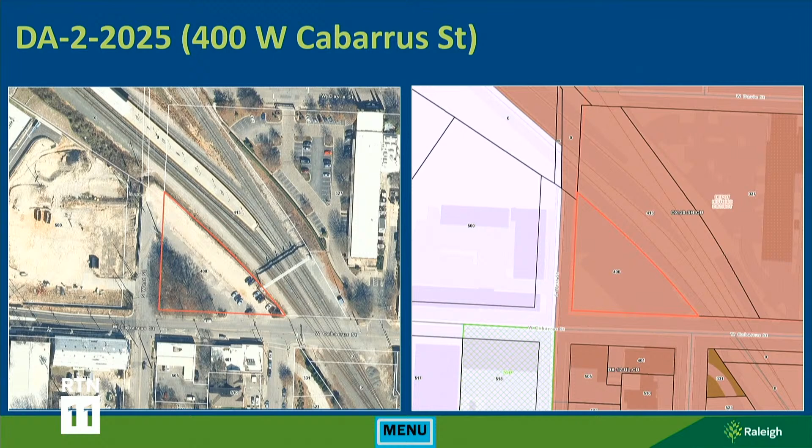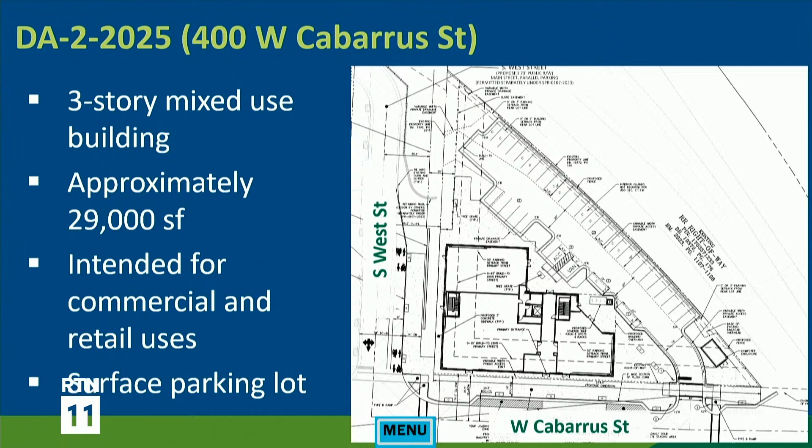The subject property here is located at the northeast corner of West Cabarrus Street and South West Street. The property is zoned downtown mixed use, 20 stories, shop front frontage, and conditional use. The applicant is proposing to construct a 3-story mixed-use building comprised of approximately 29,000 square feet with a surface parking lot. The intended uses are commercial and retail.

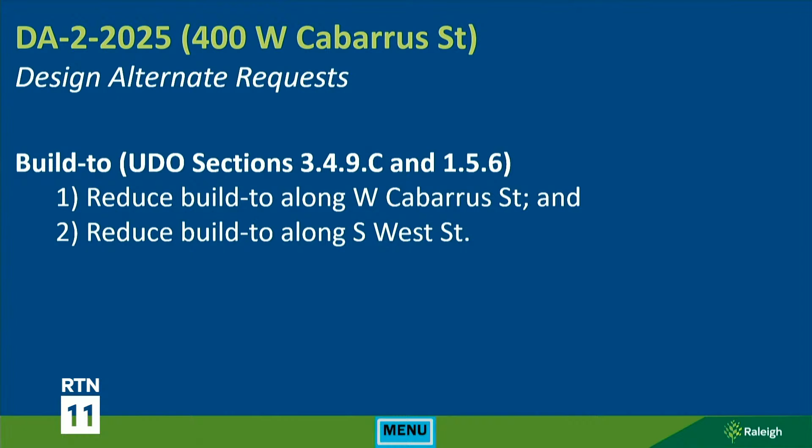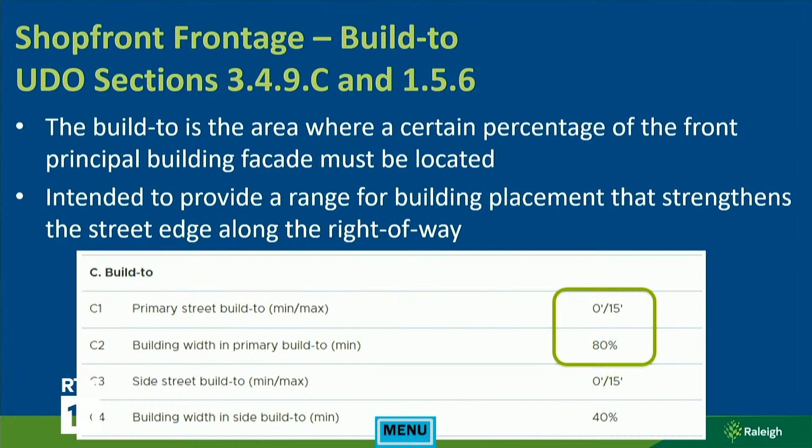There are 2 design alternate requests before you this evening: one to reduce the build-to along West Cabarrus Street, and also a request to reduce the build-to along South West Street. Build-to is the area where a certain amount of building facade is located along a street. In the shop front frontage, the primary street build-to range is between 0 feet and 15 feet from the edge of the right-of-way, and within that area, the building facade must comprise at least 80% of that frontage width.

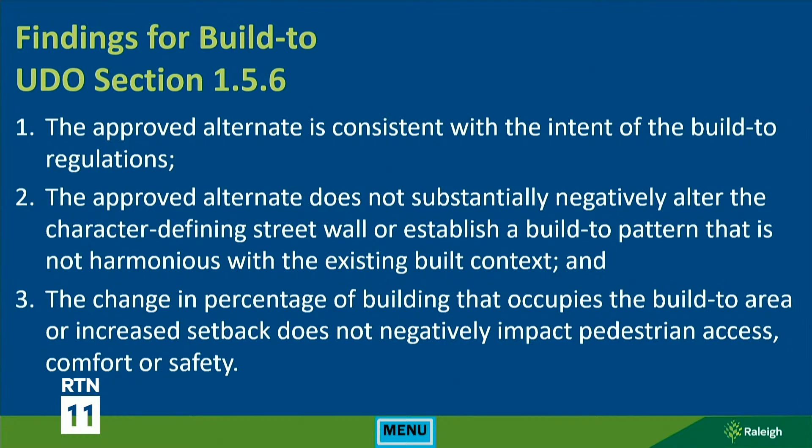To grant a design alternate for build-to, these 3 findings must be satisfied. With that, I am available if you have any questions, and I can hand it off to the applicant for their presentation. Okay, any questions from the commission?

Okay, if the applicant would come forward. Applicant will now present evidence and legal arguments in support of the request. As a reminder, any evidence and argument must focus on the applicable standards. And before you begin, if you would state your name.

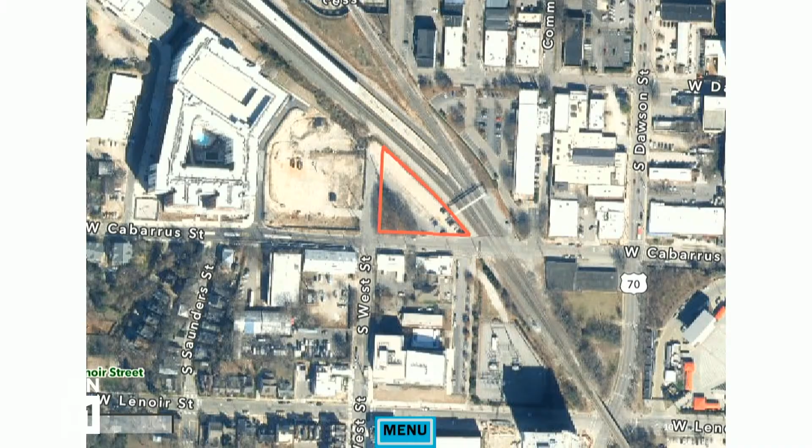The applicant is seeking a design alternate related to the build-to requirements on West Cabarrus Street and South West Street. The design alternate requests are consistent with the intent of the build-to requirements.

The intent of UDO section 1.5.6 is to, one, strengthen the street edge along the right-of-way, establishing a sense of enclosure and providing spatial definition adjacent to the street; two, supplement the building edge by architectural elements and certain tree plantings; and three, accommodate some flexibility in specific site design while maintaining the established street edge.

The intent of UDO section 3.4.9A provides that the shopfront frontage is intended for areas where the highest level of walkability is desired, to create a Main Street type of environment. Mixed-use buildings are the primary building type allowed, and the proposed layout reinforces the spatial definition of this shopfront frontage parcel by locating the structure at the intersection of two public rights-of-way and strengthening the visibility of the street grid.

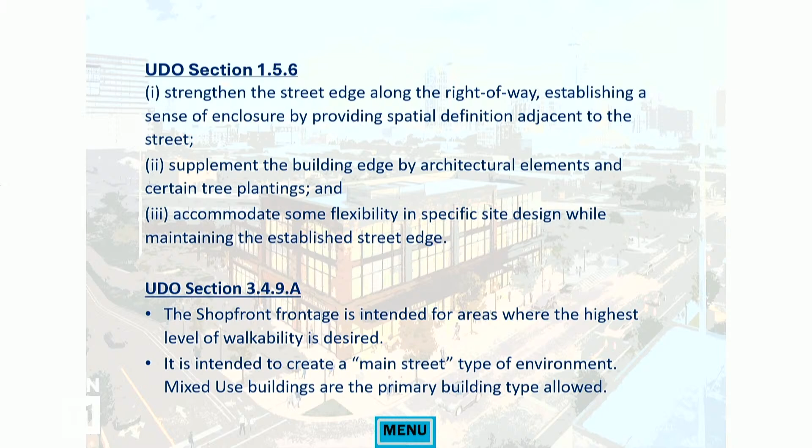The request related to West Cabarrus Street is a minimum of 76% building width located within the primary build-to along West Cabarrus Street, in lieu of the minimum 80% build-to requirement. The request related to South West Street is a minimum of 68% building width located within the primary build-to along South West Street, in lieu of the minimum 80% build-to requirement. The requests include both the building and the outdoor amenity length build-to, as will be discussed by the expert witness.

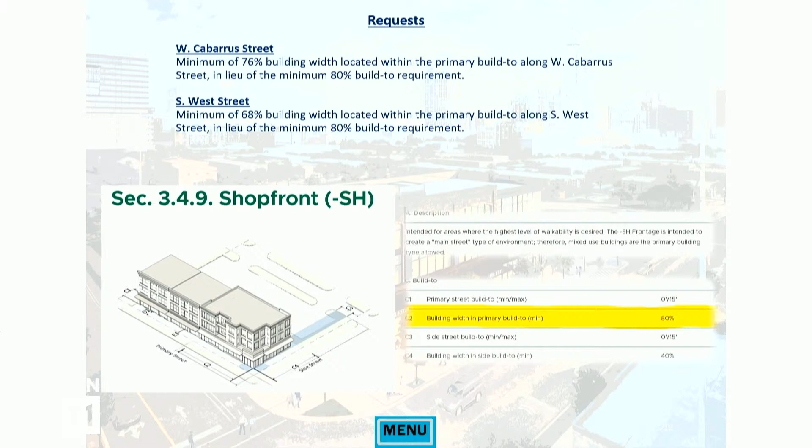Again, there are three standards that support the request for a design alternate. One, the approved design alternate is consistent with the intent of the build-to regulations. Two, the approved design alternate does not substantially negatively alter the character-defining street wall or establish a build-to pattern that is not harmonious with the existing built context. And three, the change in the percentage of building that occupies the build-to area or increased setback does not negatively impact pedestrian access, comfort, or safety.

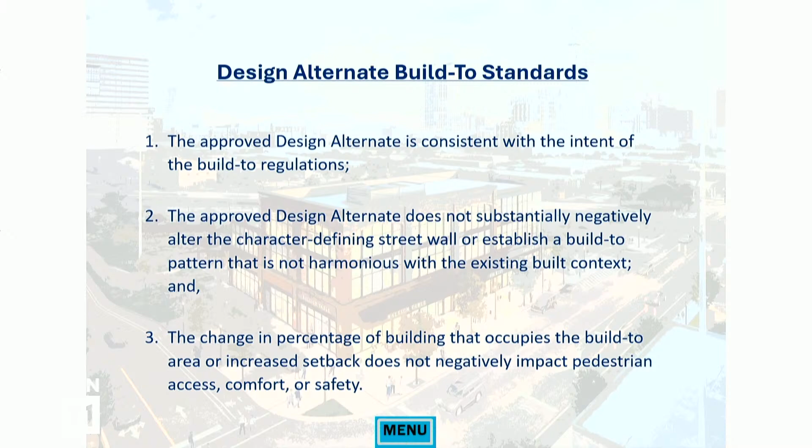I will note before we dive in that the requirements and standards for both requests are the same, so the information presented is going to feel a little bit repetitive as we move through each request.

I will be calling Mr. Michael Vamprin of McAdams to testify in this matter, and I would like to invite Mr. Vamprin up to be sworn in. Can you please state your name, address, place of business, education, and experience, along with your role in the project for the commissioners? Yes, my name is Michael Vamprin.

I'm a landscape architect with McAdams. I've been practicing for about 10 years, and with the project architect and engineer, I've helped oversee these design drawings. Do you swear or affirm that the testimony you'll provide is the truth, the whole truth, and nothing but the truth? I do. Thank you.

At this time, I respectfully tender Mr. Michael Vamprin as an expert in the field of landscape architecture and design.

As I just mentioned, the first standard is that the design alternate is consistent with the intent of the build-to regulations. For context, what is currently on the ground and what you're seeing on your screen are the current street views of West Cabarrus Street and South West Street. At this time, I would like to invite Mr. Michael Vamprin, our expert witness, to provide evidence and testimony explaining the design goals and what's driving our request for relief.

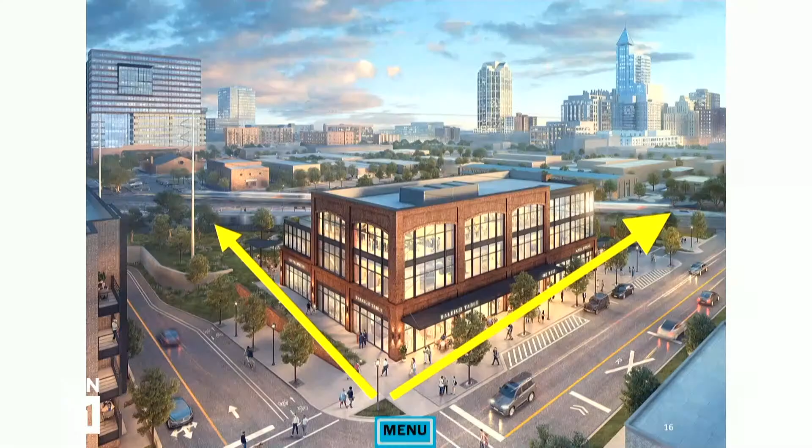We prepared some renderings and precedent imagery to help tell the story. The parcel itself is an irregular triangular-shaped parcel. On both sides of the frontage are railroad tracks, with arrows pointing north and east, and the pinch point of the parcel is bound by those railroad tracks.

On Cabarrus Street, looking to the right, the long-range planning is actually to close down that intersection to eliminate the at-grade railroad crossing, so vehicular and pedestrian access would stop there.

Long-range planning for West Street is to go underneath the railroad tracks. At the intersection closest to us, South West and Cabarrus Street, the road is about 3 feet lower than the FFE of the building.

As you approach the railroad tracks, there's about 24 feet of topographic difference. You can see the retaining walls along the street edge telling that story of how the road ultimately goes underneath the railroad tracks.

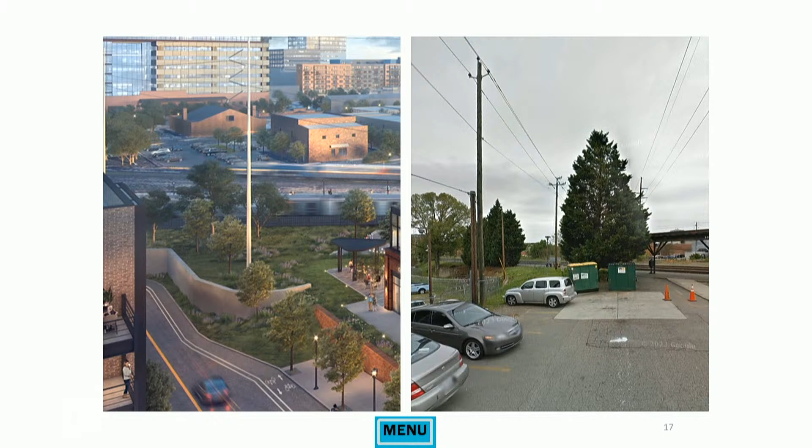This is imagery of some of the overhead utility lines out there. That gray segmental wall was actually holding up that line, and it will require further coordination with Duke Energy and the railroad in Raleigh to move that transmission pole. So that is one of the existing hardships out there today.

This is looking north along Cabarrus Street, and you can see where we are not providing building within that build-to zone. We are providing ground floor pedestrian activated spaces with seat walls, hardscape material, and some type of overhead shade structure. On the far right is our sole proposed vehicular access, as well as the surface parking lot between the building and the railroad tracks.

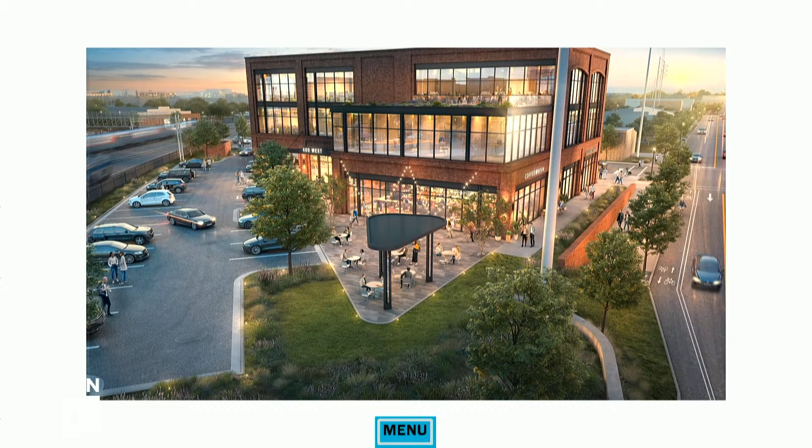This is looking south from the railroad tracks. Again, this triangular parcel geometry is picked up in the hardscape and shade structure to create a repetitive design language. We're talking about some form of outdoor activation there, and that side is the retail component of the building.

This one highlights the overhead transmission line interrupting the facade where the building would otherwise be located. This is an enlargement of the pedestrian plaza space, showing the shade structures and how we're attempting to activate the street edge in lieu of a primary building facade.

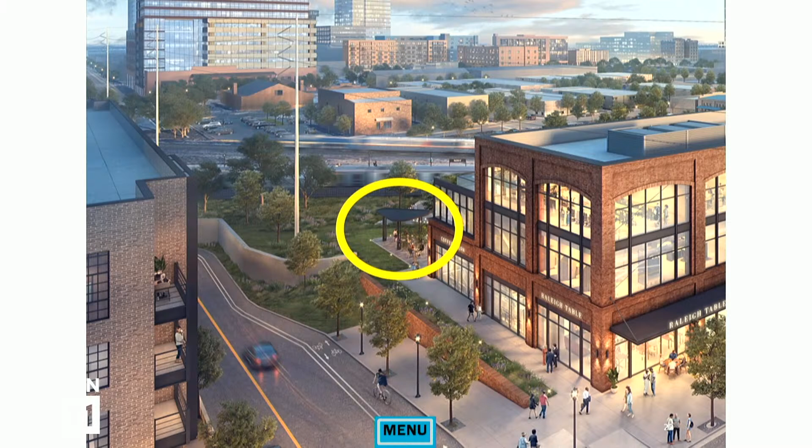Here we are placing activated outdoor amenity area spaces within that zone. Where that circle is, there's about 12 feet of topographic change from that plaza down to the street edge. Thank you, Tish.

Standard number 2 is that the approved design alternate does not substantially negatively alter the character-defining street wall or establish a build-to pattern that is not harmonious with the existing built context. Currently on your screen is an aerial view where you can see the property is the shape of a right triangle, and from there the property moves out and breaks at the railroad right-of-way.

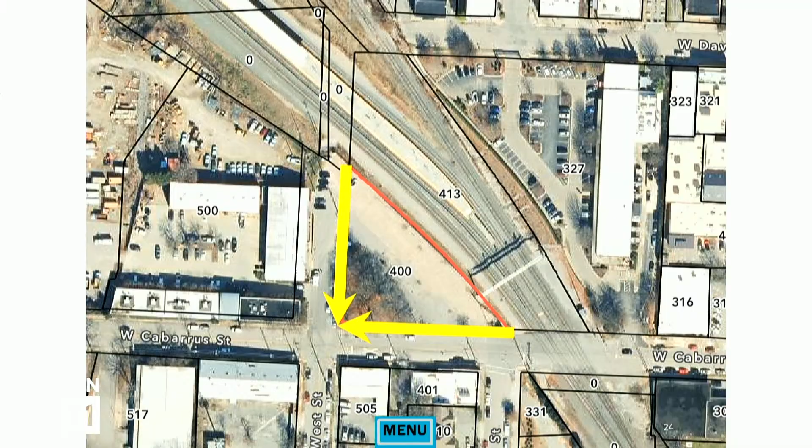At this time, I'd like to invite Mr. Michael Van Brun back up to provide evidence and testimony explaining the design goals that would maximize the character-defining street wall at the intersection while providing a pedestrian-friendly transition from the intersection to the railroad use, and the constraints on the property driving the request for relief. Thank you.

Where those easements are not placed, we are putting the primary building at the intersection of Cabarrus and West Street, trying to maximize where we feel is safest for pedestrians, which is further away from the railroad tracks and closer to the street edge. So we have sidewalks going along all the primary facades.

We weren't actually able to connect the primary mixed-use street along West Street to this facade because of that grade change, but we are still providing hardscape along the building face that would ultimately lead back to that pedestrian space.

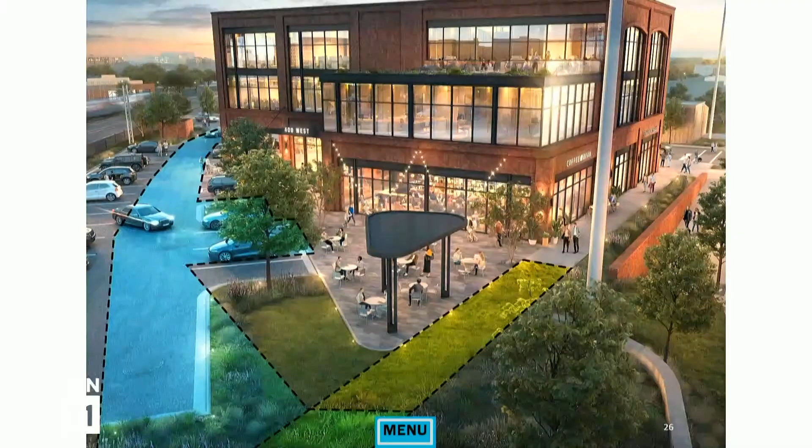This is that 3D overlay with the easements. The yellow is a slope easement where that retaining wall would be extended further into the site once that road extends through. The blue represents access easements and underground stormwater easements.

Thank you, Michael. What you see on your screen again is the rendering depicting the site constraints driving the design alternate requests. Standard number 3 is the change in percentage of building that occupies the build-to area or increased setback does not negatively impact pedestrian access, comfort, or safety.

As demonstrated, you have seen that the design alternate requests focus on the pedestrian experience and do not negatively impact pedestrian access, comfort, or safety. I would like to again invite Mr. Van Prin back up to provide evidence and testimony explaining the design goals that focus on the pedestrian experience and why they are necessary.

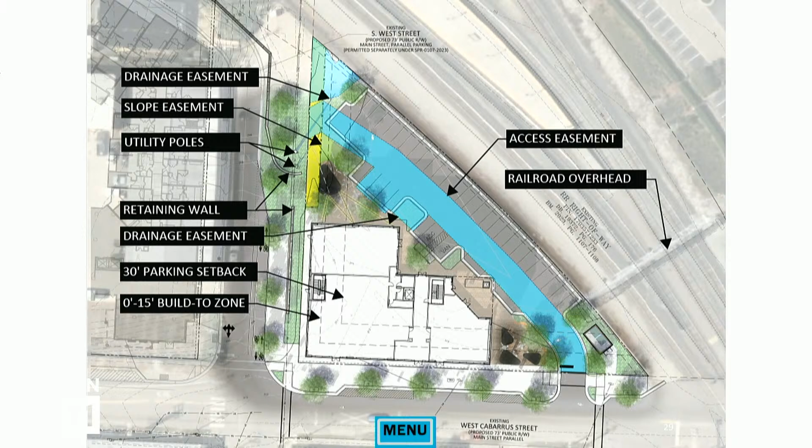We don't feel that the change in percentage of the building occupying the build-to area will negatively impact pedestrian access, comfort, or safety for two reasons. It's a relatively minor deviation from the required build-to percentage, and we're trying to focus and concentrate pedestrian access where we feel it's safer, which is further away from the railroad tracks, and ultimately at the corners of Cabarrus and West Street and along the primary building.

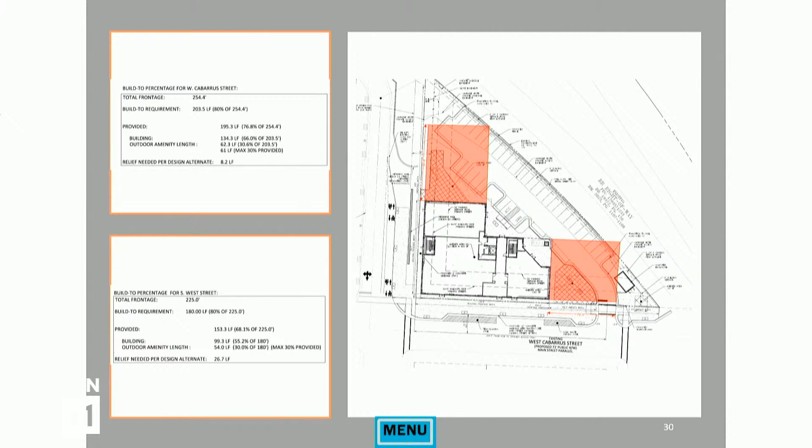This is just a really quick overlay to show what it would look like to fully comply with that 80% build-to requirement. The red is a conceptual extension of the building facade and actually gets outside of the parcel boundaries because of that triangular shaped parcel. This is just an enlargement showing what that would look like. You can see on the north side, it's touching the railroad right of way. On the east side, it actually, with that building extension, would extend beyond the subject boundaries.

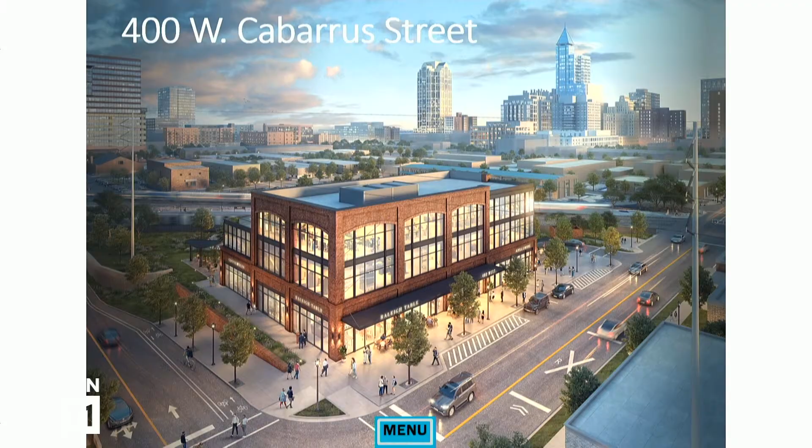In summary, the applicant has provided competent material and substantial evidence through expert witness testimony that the approved design alternate is consistent with the intent of the build-to regulations, does not substantially negatively alter the character-defining street wall, or establish a build-to pattern that is not harmonious with the existing built context, and the change in percentage of building that occupies the build-to area or increased setback does not negatively impact pedestrian access, comfort, or safety.

At this time, I would like to ask again that the staff report, all of the materials submitted, including today's slide presentation, and the testimony of the applicant's expert witness be admitted into the record. Thank you. Received. And that concludes our presentation this afternoon, and we're here to answer any questions you might have.

Okay. Commission questions? I'll start. Just a quick clarification. The renderings and some of the plans shown in the presentation differ slightly from what's in the agenda materials. It shows shade structures in those amenity areas, whereas the plan shows tree wells and trees. Can you confirm which of those is accurate? The applicant wants to go forward with what is shown in the renderings today.

Okay, and the site plan is an old site plan. So the shade structures, no trees inside of the amenity? I think there's three total. Yeah, there's two little small trees inside them right now, but we would retool that area to show these seat walls, that little hardscape plaza spaces, and then those shade structures.